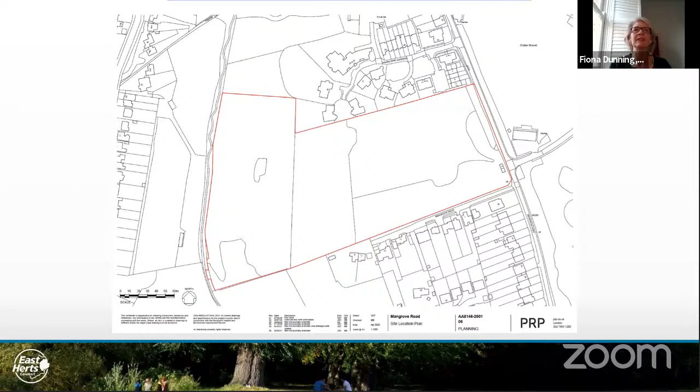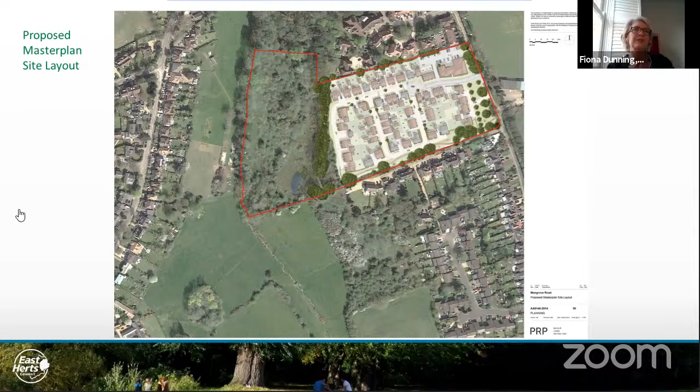Okay, if we could move to the next slide, please.

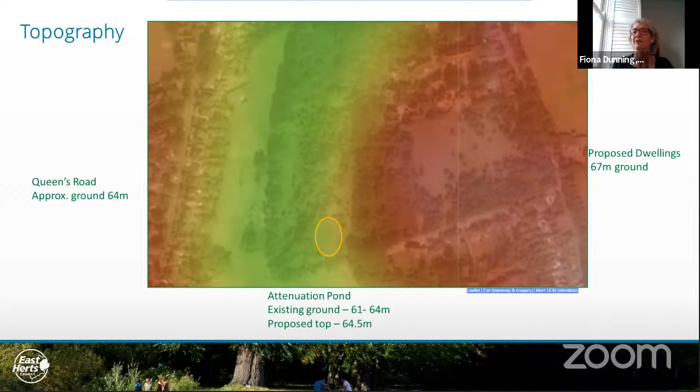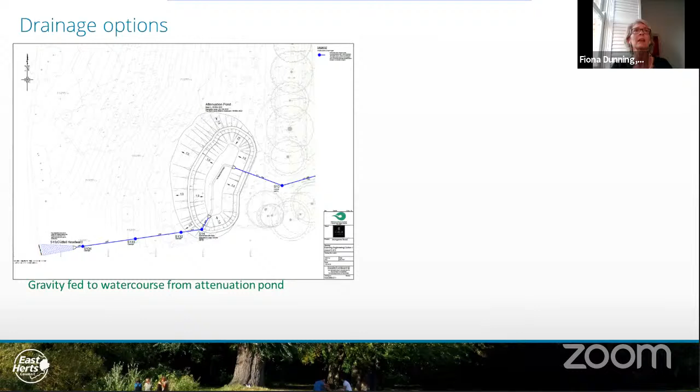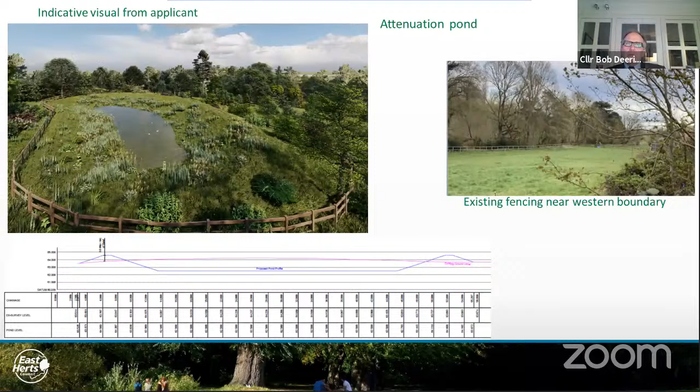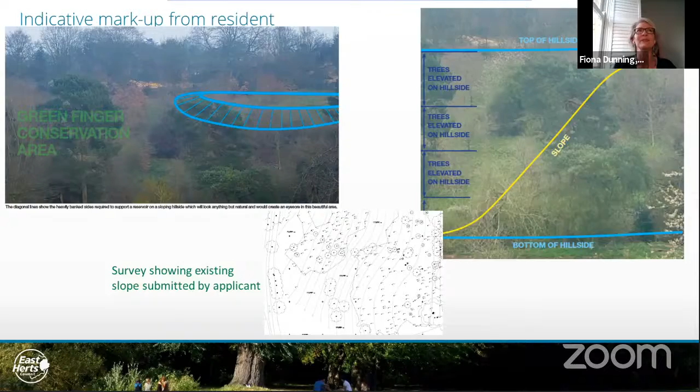Thank you. Sorry, I missed that.

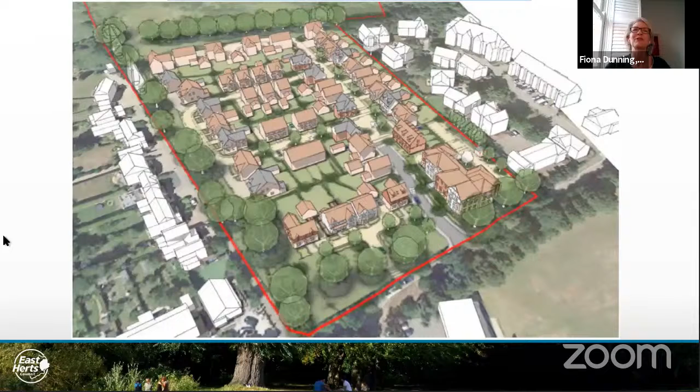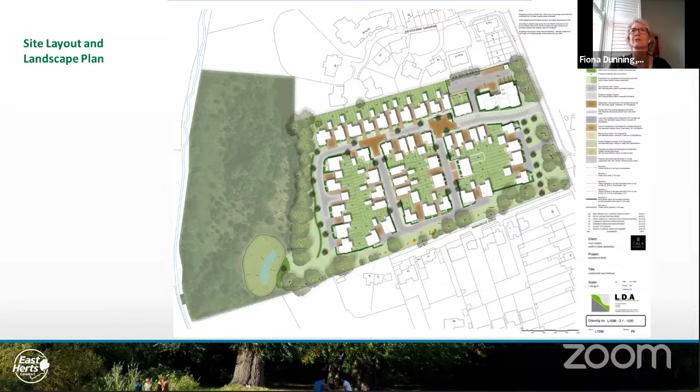Sorry, if you can just go back to that slide. So the dark green trees are the proposed trees on the site. You can see that there are additional trees planted on the site, and most of the trees fronting Mangrove Road are proposed to be retained, as well as the southern boundary trees and the beech trees and associated line of trees. So if we move to the next slide.

So this is just a perspective of the development looking from the eastern side of Mangrove Road. So you have 4 dwellings at the front of the site. These dwellings have their own access onto Mangrove Road. And then to the north of that, the main access into the site is provided where the apartment building is located at the front of the site, where their car parking is provided behind the building.

When you're walking past the site, it's not mainly car parking that you will see. The apartment building is proposed to be for most of the affordable housing, and the majority of them are 2-bedroom family dwellings, so they can have up to 4 people living in them. There are also other affordable housing units - 10 houses altogether. The remainder of the development is for market housing.

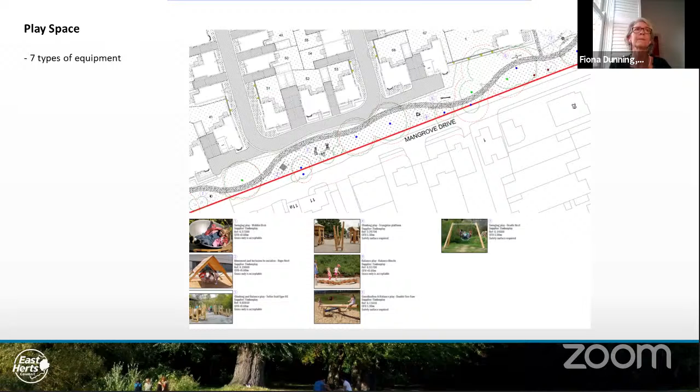The master plan did permit a 3.5-story apartment building, similar in height to the one at Ashbourne Gardens. But in the assessment of the proposal during the pre-application stage, it was considered that a 3-story building would fit much better in the development site. So that's why it's 3 stories rather than 3.5. The remainder of the site is 2-story with rooms in the roof for some of the dwellings. Because it's in a conservation area, at this point in time there are no permitted development rights for loft conversions in the legislation.

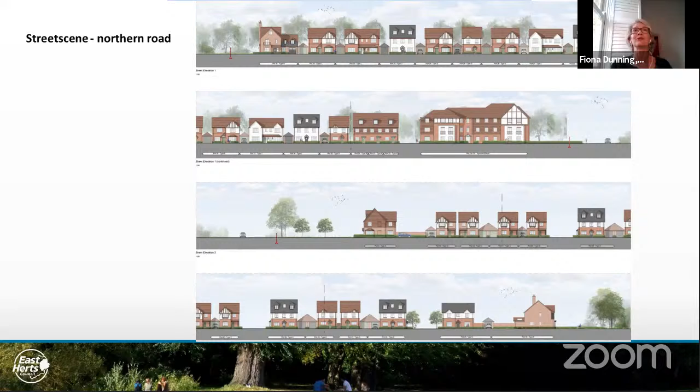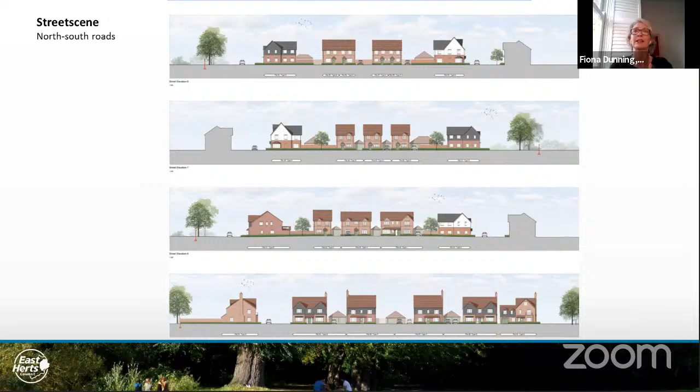In conclusion, I just wanted to highlight that proposed condition 33 limits the garages to be used as garages, not as additional living space. That would require a planning application and would be subject to an assessment of car parking, which I think was a concern for some people. There are a number of conditions in the report and update sheet covering areas I haven't addressed in detail in this presentation. In addition, there are the Section 106 heads of terms, set out at paragraph 8.42 to 8.49 of the report, covering contributions towards open space, playing fields, schools, etc. I'm happy to respond to any questions.

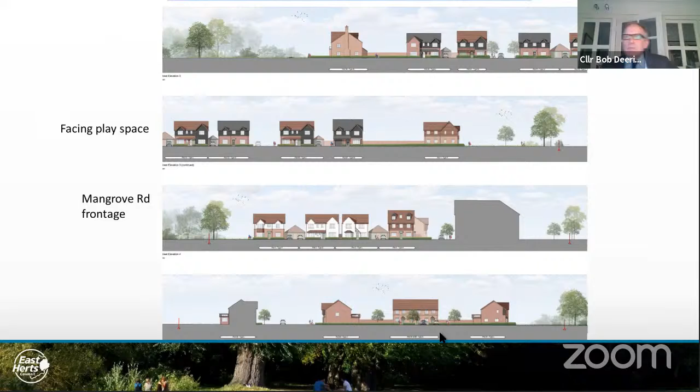Thank you. Thank you very much indeed, Fiona. That was really a very thorough presentation. I wonder if I can just raise a couple of points with you, by way of extending your presentation, before we throw the floor open to members.

Some weeks ago, trees were felled on the site, and that caused some concern to local residents. I think I'm also right to say there's been some comment from local residents that some elements of the application before us now were not adequately foreshadowed at the exhibition that occurred, I don't know, more than a year ago at the cricket club just over the road. I wondered if you might want to comment on those two points, just to set the scene.

Sure, certainly. The tree removal did generate a lot more objections this year because the application was consulted on quite some time ago. The tree removal was always part of the application, and it was set out in the application.